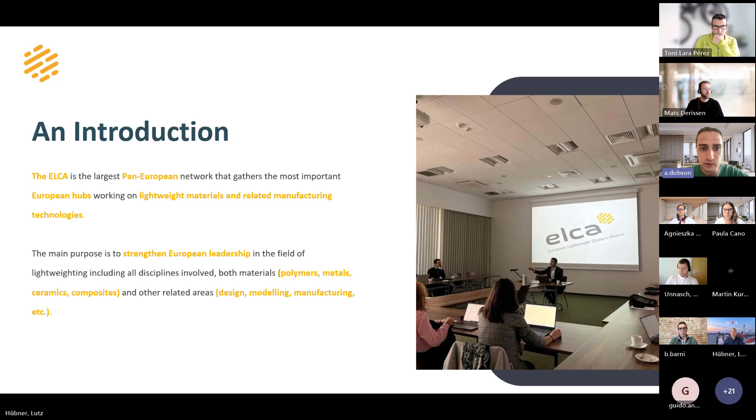So there's a multi-material approach, a multidisciplinary approach, and a multi-sectoral approach. This is a summary of the scope, but there's always room for delving deeper into different types of materials, covering polymers, light metals, ceramics, composites, across different areas such as recycling, manufacturing, different techniques to look at materials, disassembly, modeling, functionalization, etc.

Through this, we have working groups which span across different sectors of the value chain. Within sectors we have mobility, energy, building, and industry. This is something we're always looking to expand within, and like today, delving deeper into the mobility sector to do some joint activities with rail transport.

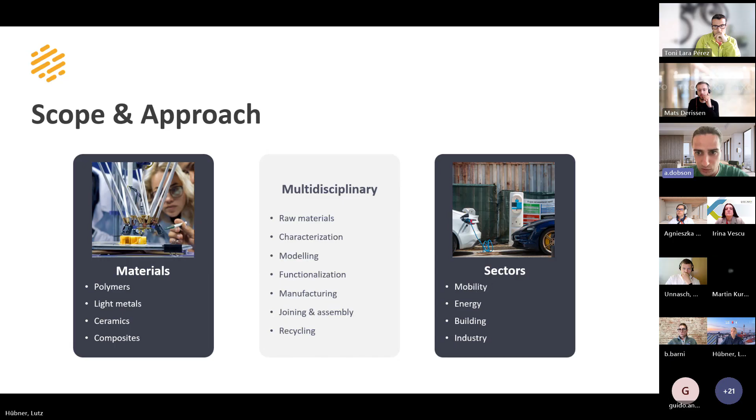As I mentioned, it's not particularly advanced, but copper has been a strategic raw material in the EU since 2023. I'm showing you this graph because it shows quite vividly that this material has become much more valuable over the last years, from this mostly overlooked metal that's always there to becoming quite valuable, with around 12,000 euros per ton in 2026.

The main reason for this is that it has such widespread use in electrical applications, and it's quite hard to substitute. It's not easy to find a good replacement. And the volume of copper has been increasing over the last years. We had 20 million tons of copper usage in 2020 in Europe alone, and the EU Commission expects it will increase by more than 50% by 2050. So it is very valuable, and that's where our story begins. Next slide, please.

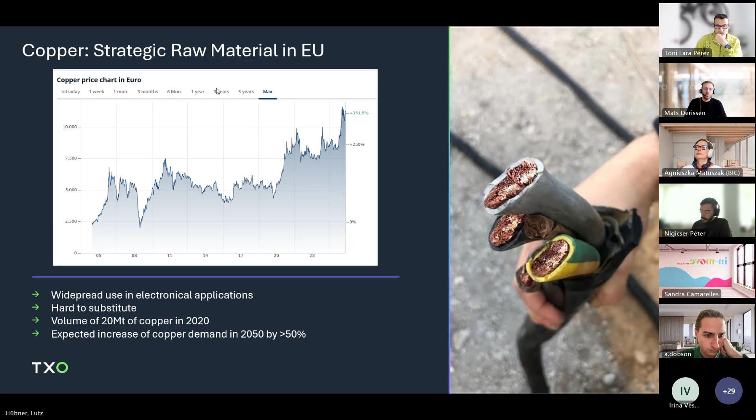We started quite early with the valuable copper material in 2007 as a company called Techport Service GmbH, mainly focusing on the telecommunication sector in Germany. We worked with Deutsche Telekom, focusing on collection, transport, and logistical handling of the cables. Since then, we continuously moved towards a more full-service approach, covering more aspects along the circle than when we started.

With the transformation to rail, we explored new branches. We came into the rail sector and found out that the processes we had established over the last years in the telecommunication sector can be easily applied in the rail sector as well.

Since 2024, we have been part of the TXO group, with a much more international focus. We are still operating as a German entity in TXO, and we continuously widened our services in the rail sector. Now we have around 40 employees in Germany, 450 worldwide in 13 locations on 5 continents. To sum up our main goal: we manage the complex recycling chain for infrastructure operators end-to-end, economically and sustainably, always in line with the circular economy. That's basically our daily process. Next slide, please.

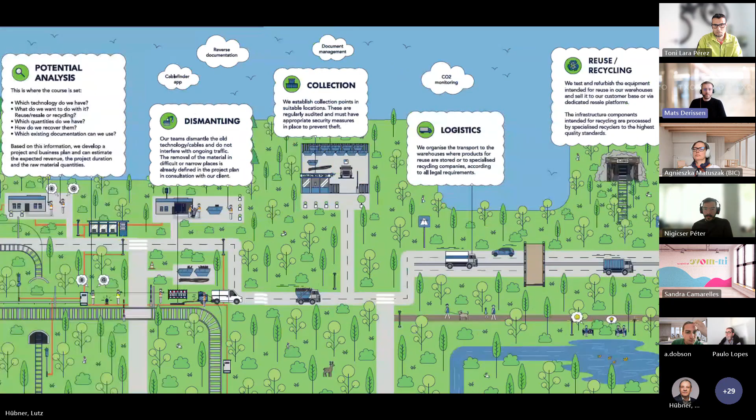We, as TXO, take care of the obsolete technology and provide all types of parts to it. So first of all, next slide, please. First of all, we start with the potential analysis. So what type of material do we have? Where do we find it? How can we access it? And oftentimes, the earlier we are invited into the process, the more materials we can recover at the end of the whole process. So if you want to get us on board, the earlier the better, basically.

And with the potential analysis, with the business plan and project plan, we can start the dismantling process where we work closely with subcontractors, which we have already worked with for more than 15 years. So we know them very well. They know what we expect from them. And from that, we move on to the collection points where we store the valuable materials. We have regular security checks on these collection points, so we know the materials are safe there.

And from there, we move on to the transportation of the materials to the reuse and recycling facilities, or we prepare the material for resale. So whatever type of value is still in the materials, we try to shift it in the right direction. Next slide, please.

And finally, we come to the point of the reporting. We make an assessment on the material saved, the CO2 emissions saved, and also the whole transparent process. How did we get the materials? What has ended up as waste? What has ended up as recycling material, etc. At the end, next slide, please.

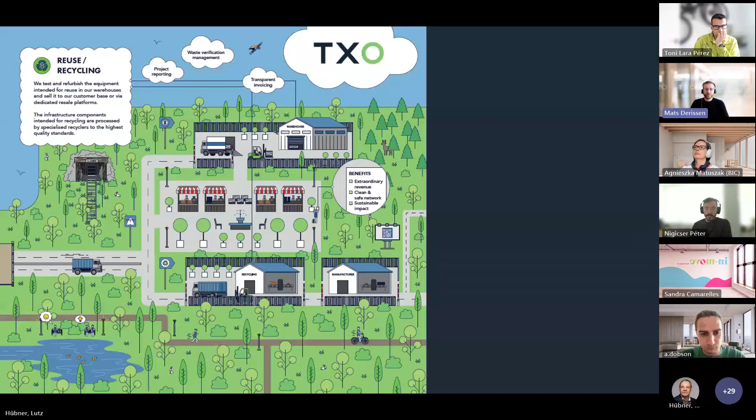Our main benefits are economic efficiency, mainly due to the efficient process we have established, but also the copper material has such a big value that it can offset the cost of the whole project planning and management of the materials.

We create clean networks. So after that, you can use the infrastructure again and use it for the modernization projects, put in new cables and other technological aspects. And of course, we can create a secondary stream of copper. So we don't necessarily need to extract virgin copper from the mines, which reduces CO2 emissions as well. Next slide, please.

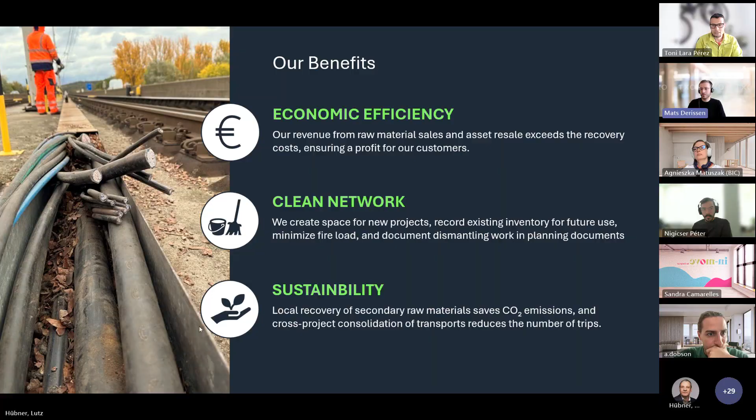No, I guess that was the last one. Oh, okay. Usually there are two more. I'm just gonna make a quick switch. Oh, one moment. You can see it? Yes.

And in Königswinter, the road to the south, the third part, we mainly made space for new cables inserted into the cable ducts. So it is more of a cost-saving procedure. You don't need to buy or build new cable ducts, you can just use the old ones again. And just to show you some impressions.

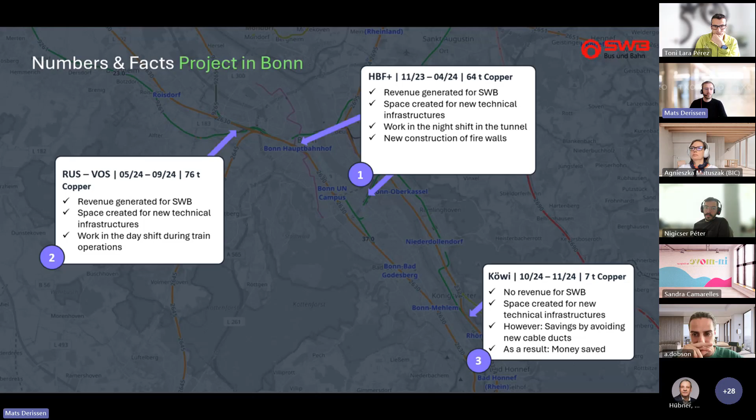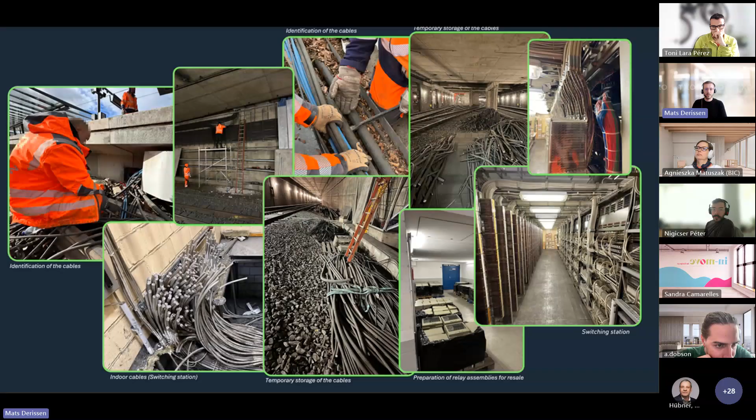And later on, we have a temporary storage, mostly of the cables, or as you see in the central right, we prepare material for the resale of it. So every time we look into the projects, we already know, okay, this can be resold, this can be recycled, this is roughly the amount, how can we exit it, etc.

And at the end, for this particular case, we made a certificate of the amount of CO2 emissions saved and the amount of copper saved. And it was also acknowledged by the local news, where they made an article about how urban mining actually works, and took our project as an example of the whole process.

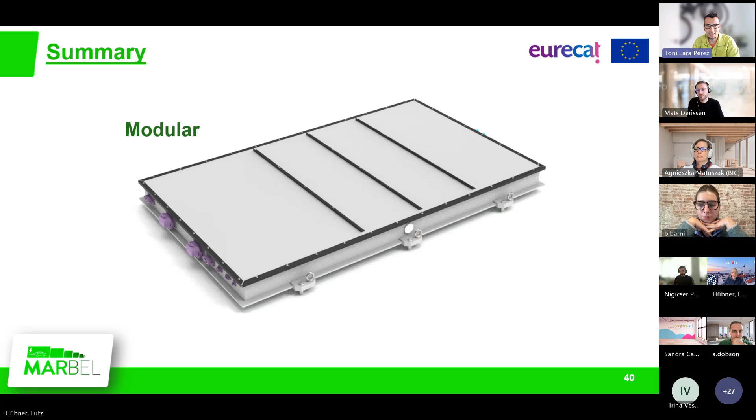Okay, thank you, Angus. So the idea is to present the battery design that we performed in the European project MARBEL, that ended last year. Please, Lutz. This is the battery of the MARBEL. If you can click, Lutz, because this battery is modular, it's lightweight. Also, it's thermally optimized and easy to assemble and disassemble. In this presentation, I will explain the modularity and the easy assembly and disassembly.

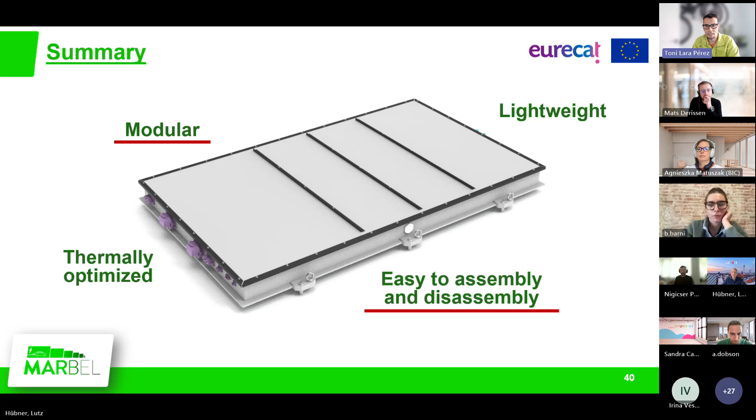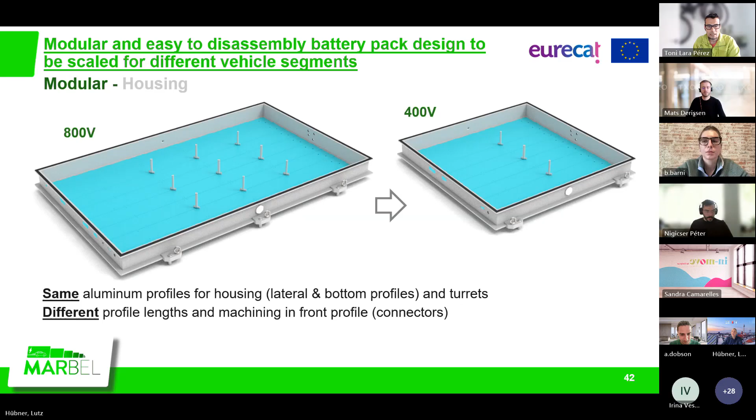Regarding the modules, we use the same modules for the two batteries, and the only difference between the two batteries is the number of modules. In the case of 800 volts, we use 32 modules, and in case of 400 volts, we use only 16 modules. Next slide.

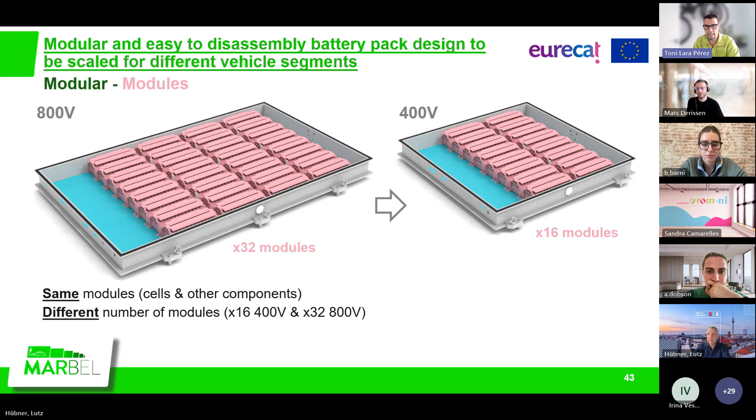Regarding the electric bus bars, the electronic components, and also the connectors, we use the same bus bars between the different modules, the same electronic boards, and the same type of connectors and DC box. The only difference between one battery and the other is the bus bars that go from the modules to the junction box itself, and also the number of connectors and electronic boards. Next slide.

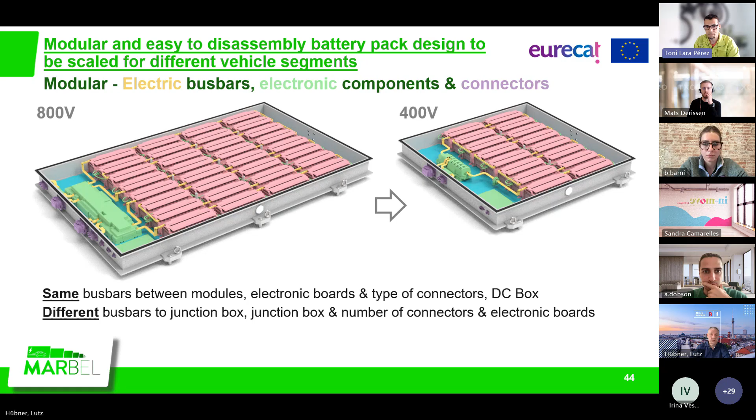Regarding the cooling system, we use the same cooling distribution and the same top and bottom cooling channels. The only difference between the two batteries is the length of these cooling channels or cooling profiles. Next slide.

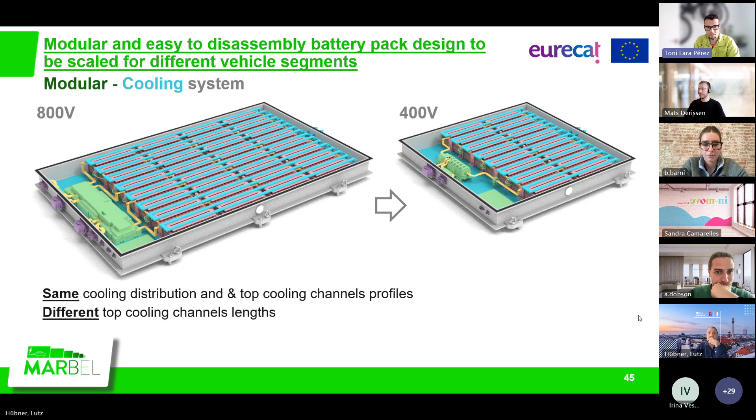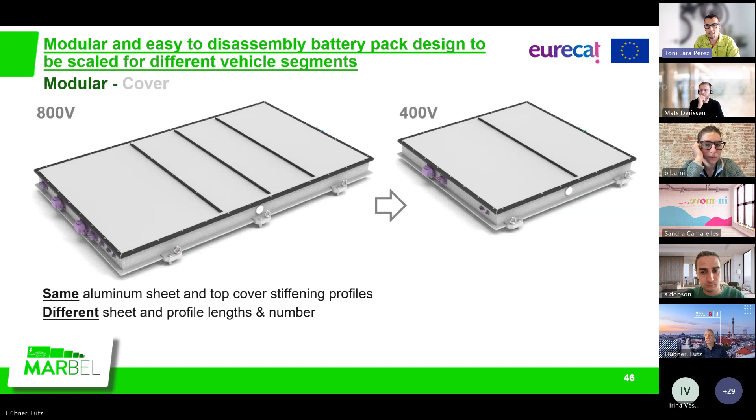Okay, next slide. Now regarding the easy to assemble and disassemble, here we explain about the battery pack. Okay, the battery pack housing was a fully aluminum housing, easy to disassemble and easy to recycle. And we use 6063 aluminum with 60% of recycled aluminum. Okay, next slide.

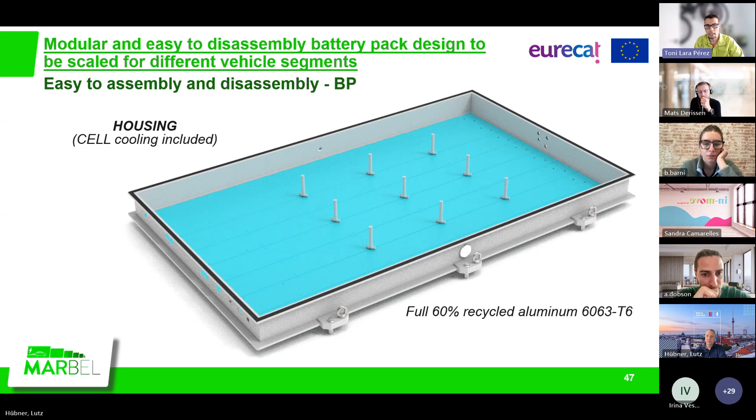Regarding the modules, all the modules were screwed to the housing, so we can repair, we can substitute one module if it's necessary. Next slide. Regarding all the bus bars, electronic components, and also the connectors, all the connectors are screwed, okay? We avoid the welded connections to improve the assembly, but also the disassembly of the battery.

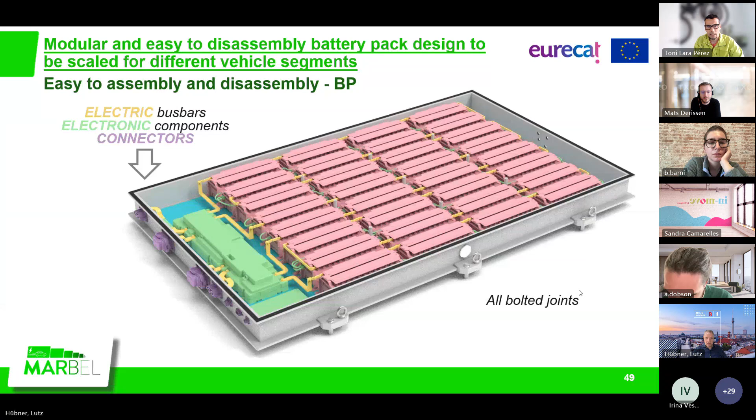Next slide. The cooling system also was screwed, okay? All the distribution of the cooling system was screwed in the housing. And in this case, we use two cooling systems, one in the bottom of the battery pack to cool the modules, and another one on the top of the modules to cool the bus bars of the battery. And these top channels were only supported by the modules.

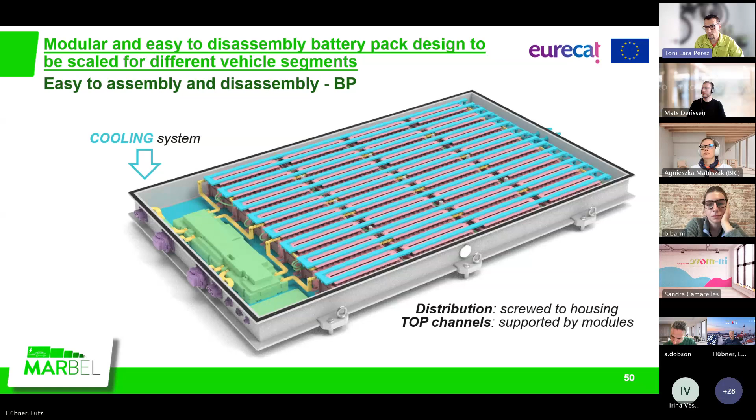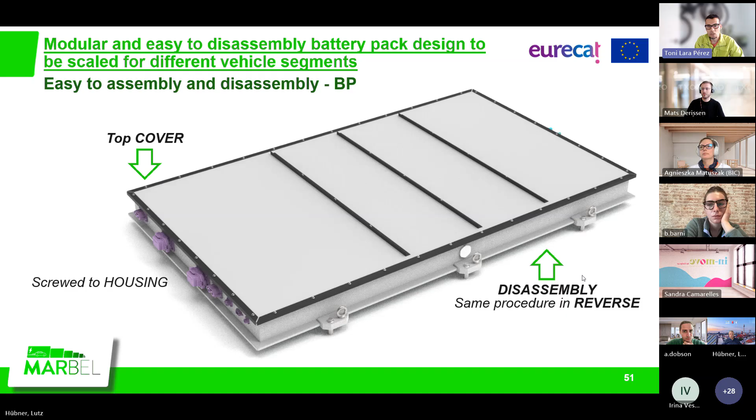Next slide. And finally, regarding the cover, the cover was also screwed to the housing. So the same principle to assemble the battery, we can use to disassemble the battery in reverse. Okay, and the next slide is regarding the modules. In the case of the modules, we use 12 cells. We also use the cooling fins and cooling pads to cool the cells, and also the compression pads.

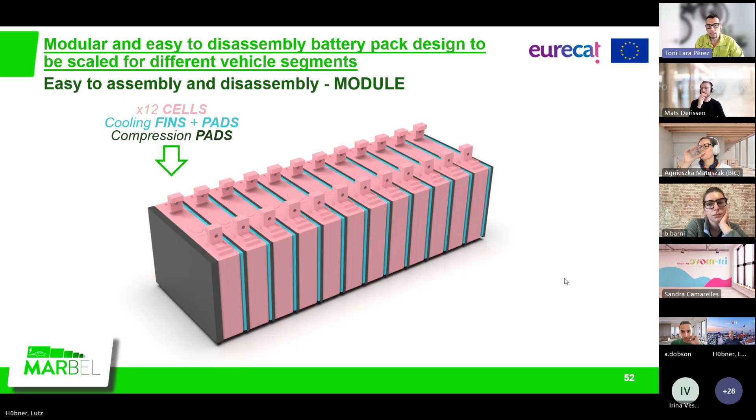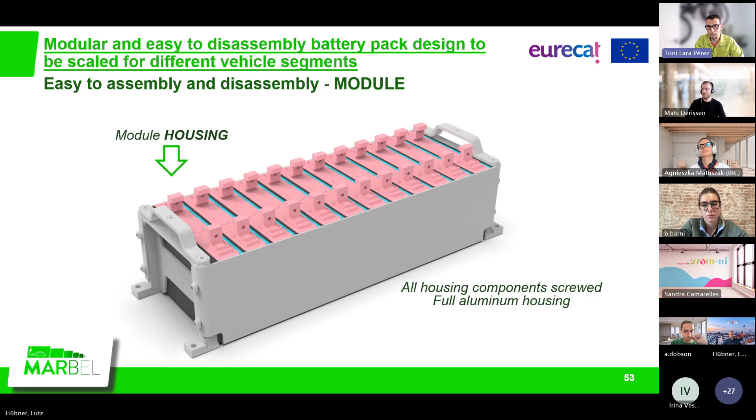Okay, and next slide. All the electronic and electric components are bolted. As I said before, we avoid the welded connections, so we can remove these electric and electronic components to repair or to remove one cell if this cell has some problem.

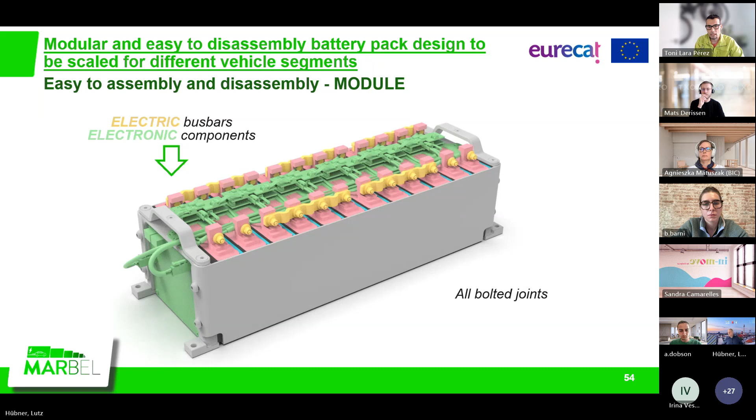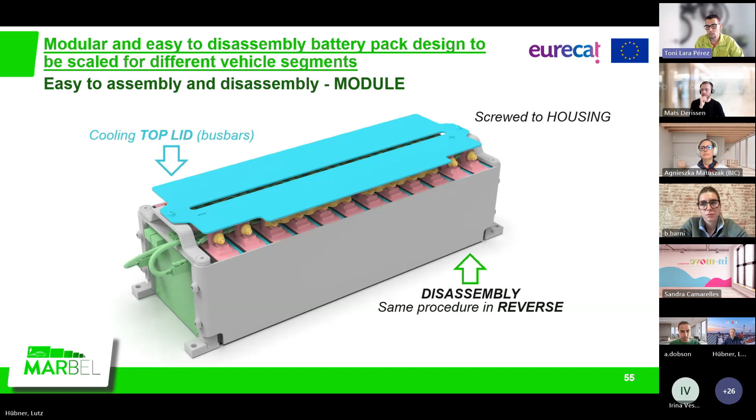And finally, the next slide, Lutz. It's regarding the top lid. This top lid is needed to cool down the bus bars, and it's also screwed to the housing. So we can use the same procedure in reverse to dismantle the full module and also the full battery. And I think that's all. Yes, it's all from my side.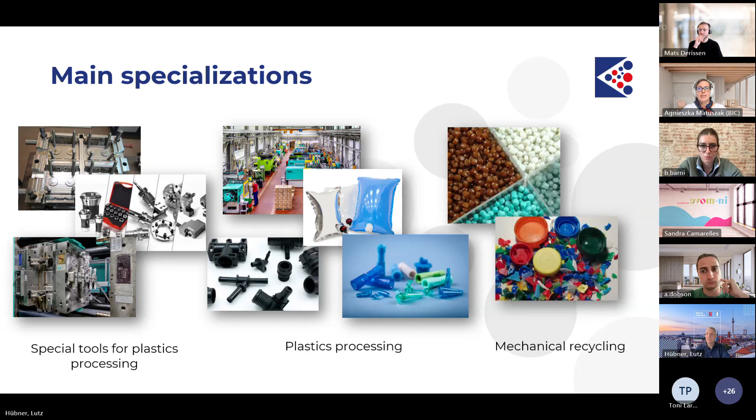Members of the cluster provide injection molds and other tools for polymer processing. They manufacture a variety of products for other branches, including automotive, medical products, cosmetics, electronics, home appliance, packaging, and many others. Our members also produce master batches, coloring agents, and modifiers, and supply plastic granules, machinery, equipment, and software solutions. They also provide services of assembly, packaging, storing, and recycling.

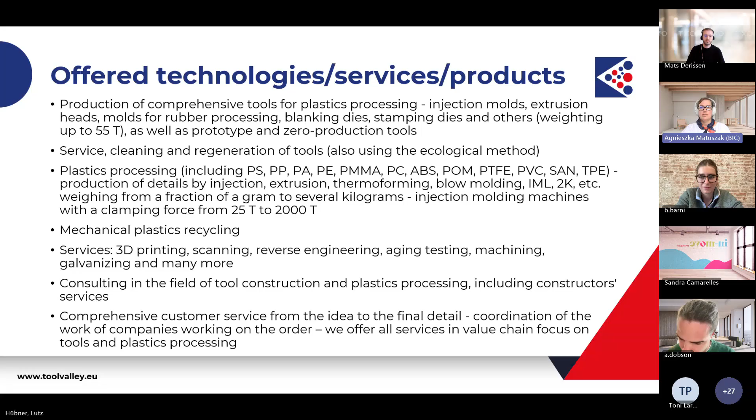By doing so, we create a value chain and a network of close collaboration that allows us to perform joint activities across many areas of the business. Next slide.

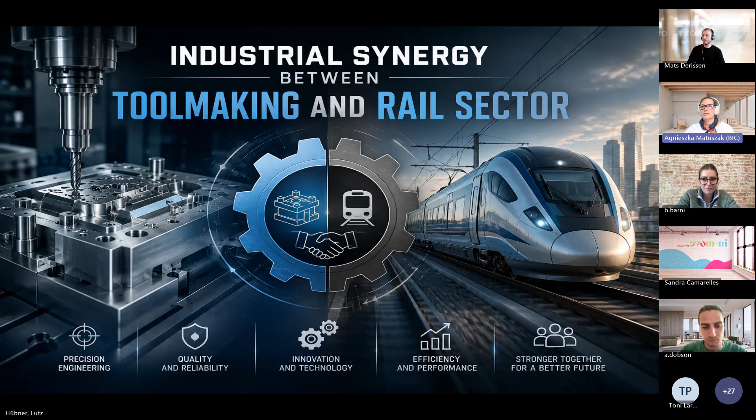The collaboration between the tool and processing industry and the rail sector unlocks a vast field of innovation. From rolling stock components to infrastructure systems, precision tooling is the foundation of modern rail mobility. Our solution bridges the gap between the tooling and plastic processing industry and the rail sector by delivering end-to-end support, from design and prototyping to serial production and component lifecycle maintenance. Next slide, please.

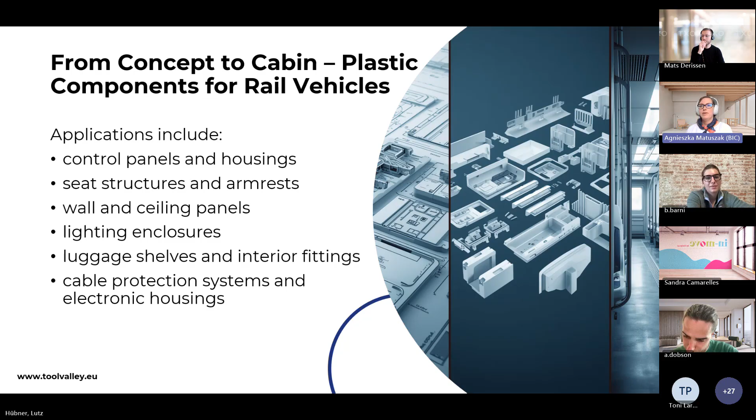Injection molding and advanced tooling enable the production of critical interior and functional components for trains, trams, and metros. Applications can include control panels and housing, seat structures and armrests, wall and ceiling panels, lighting enclosures, luggage shelves and interior fittings, cable protection systems, and electronic housing. Plastics are now essential in both passenger and driver cabin environments. Next slide.

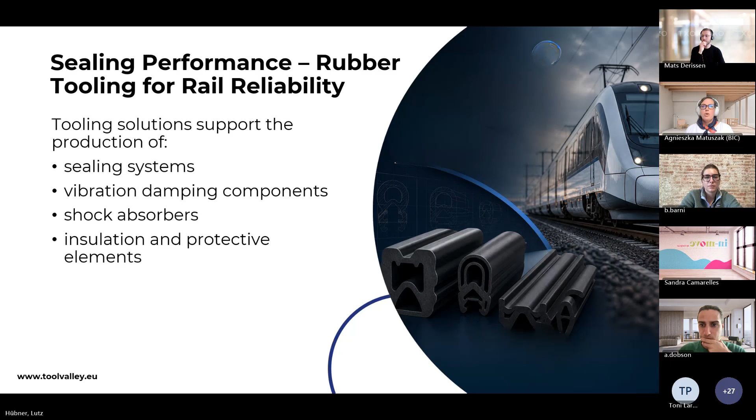Rail systems demand durability under extreme conditions. Tooling solutions support the production of sealing systems, vibration damping components, shock absorbers, insulation, and protective elements. Precision rubber tooling ensures safety, comfort, and long-term operational reliability. Next slide, please.

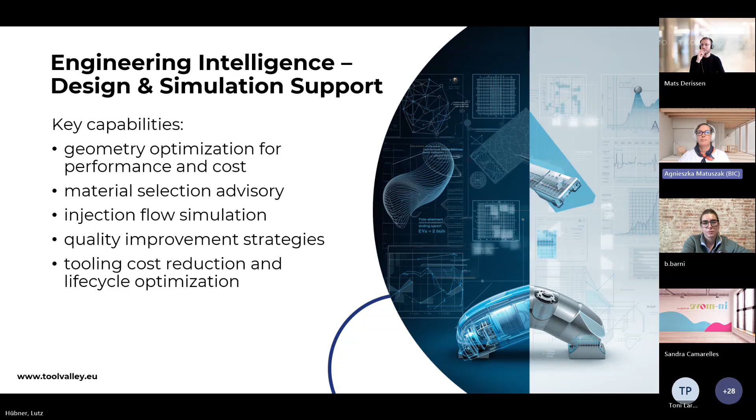Modern tooling is not just manufacturing, it's an engineering partnership. Better design means smarter production from day one. Key capabilities: geometry optimization for performance and cost, material selection advisory, injection flow simulation, quality improvement strategies, tooling cost reduction, and lifecycle optimization. Next slide.

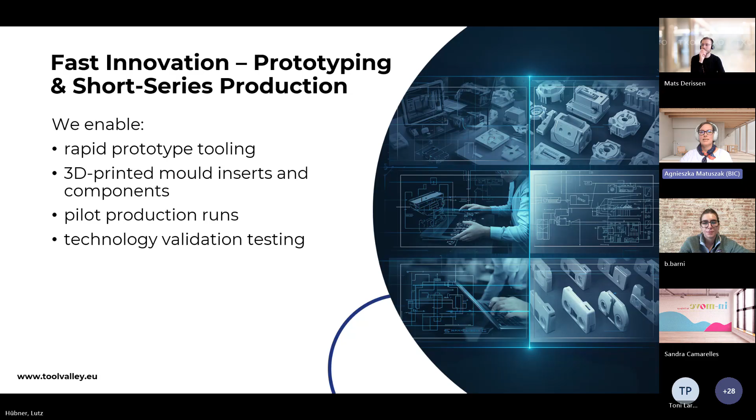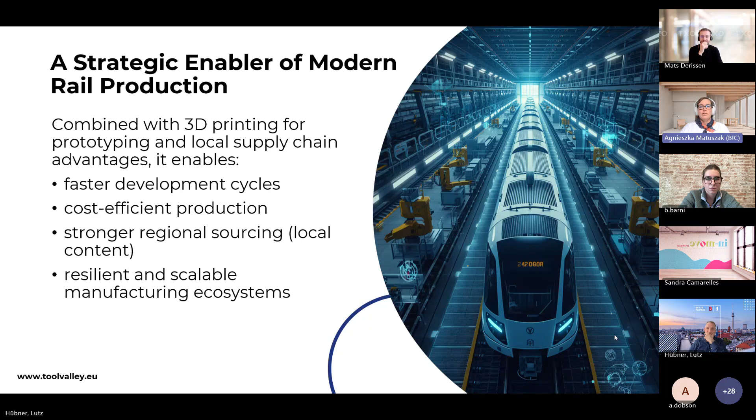Probably we will go to the last slides. Yes. So the high quality and extensive scope of the offered services is a result of technological advancement and innovative approach of the cluster members and the cluster's close collaboration with R&D units. Owing to this, our companies supply products to the largest global companies operating in various branches of industry to almost all European markets. We invite you to do business with us. Thank you.

Hello. Yeah, thank you very much. Thank you very much, Martin. I believe it's a bit of a last minute entry, so we're very appreciative and happy to share something. Yeah, I can just pitch shortly who we are. I just need to reopen the slide here and share with you. And I can send it to you afterwards. Wonderful. Thank you very much.

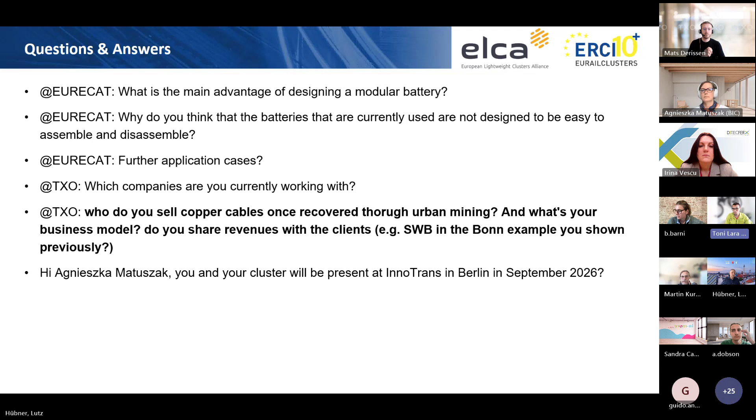In one of your slide pictures, I saw an electric vehicle plugged into a charging station. Is this the only application case for your battery concept, or do you have further application cases, maybe for electric trains as well? The main advantage of the modular battery is that it works for different types of cars—we can use the 400 volt battery for smaller cars, and the 800 volt battery for another segment. But we can also use the same battery for a bus or a train, because it's modular. You can increase the battery as necessary, so you can build it as you want.

So then I have at least two questions for Mats from TXO. Which companies are you currently working with, Mats? Yes, thank you very much, Lutz.

Currently we are working with metro providers in larger cities in Germany. I showed you the example of Bonn, but it's also Stuttgart, Cologne, and Nuremberg—smaller companies in regard to rail systems. But we also work with OEMs such as Siemens Mobility, and we just started expanding into the international market with first projects in Salzburg, Austria, and piloting in France. What we've experienced over the last couple of years is that the process we've established is easily applicable to all types of partners, smaller and larger scale, as well as OEMs, in Germany and other parts of Europe. So this is the range of partners we currently work with.

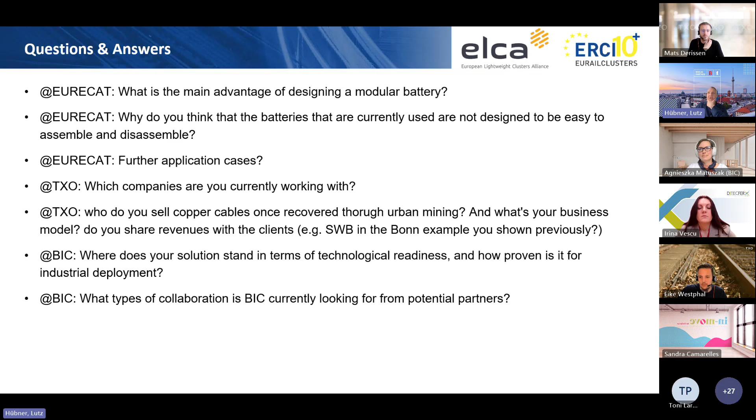Thank you. Coming back to TXO, three important questions. One question: when do you send off for recycling? Do you know what happens with the remainder of the materials aside from copper, the plastics, etc.?

Yes, thank you for the question. We track everything within our system, and for example, in terms of the plastic, we know that they're recycled for traffic components - so when you build a construction site, barriers, construction site foundations. These big black plastic foundations are usually made from the recycled plastic from the copper cables. So we have a very clear understanding of what happens with different streams and have it all in our systems.

The main challenge, I would say, is currently in the first phase, the potential analysis - we often come across the process along the work where we identify more and more potential which we didn't know in the beginning. This makes it much harder for us to rearrange and find, oh, we can also change that, or use, or have new sources found within the work we haven't previously found in the potential analysis.